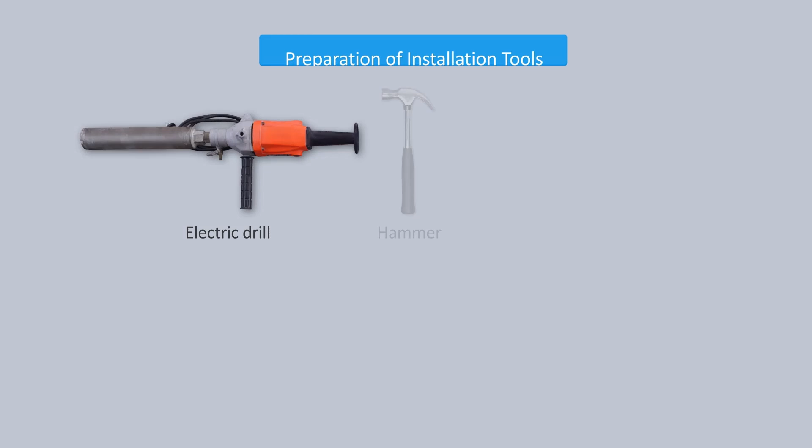Pipe preparation. Cut the suitable length of copper pipe as required. Turn pipe cutter slowly and keep increasing force gradually. Make sure there is no deformation. Cut surface should be level. Put the open of pipe downward and remove burr inside with a scraper.

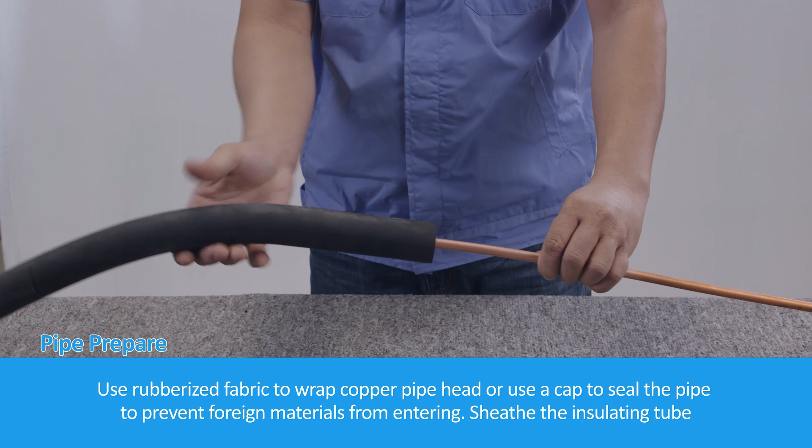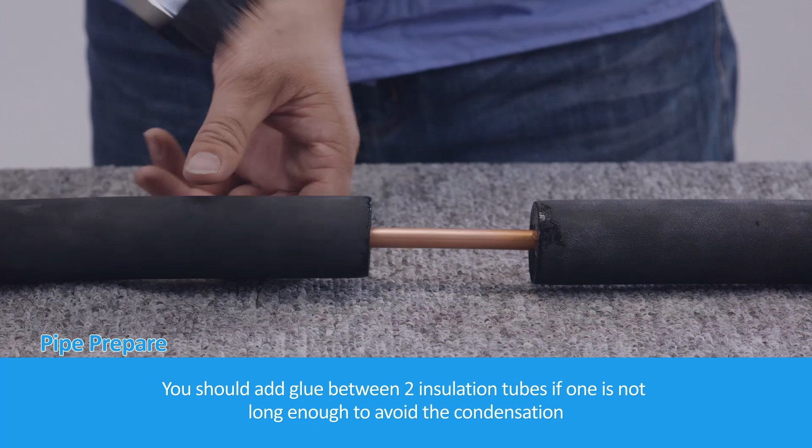Use rubberized fabric to wrap copper pipe head, or use a cap to seal the pipe to prevent foreign materials from entering. Sheath the insulating tube. You should add glue between two insulation tubes if one is not long enough to avoid the condensation. Sleeve the nut.

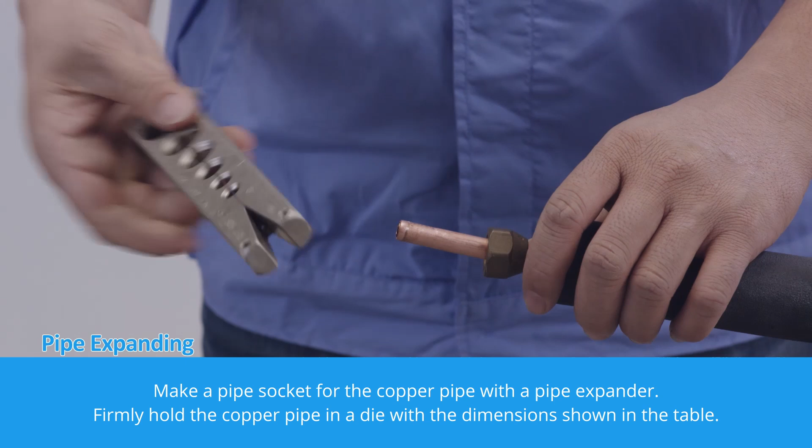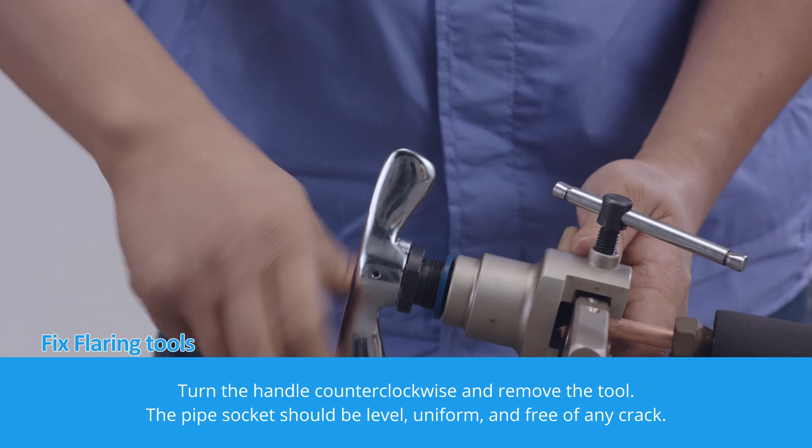Pipe expanding. Make a pipe socket for the copper pipe with a pipe expander. Firmly hold the copper pipe in a die with the dimensions shown in the table. Fix flaring tools. Turn the handle clockwise and stop it when it rattles. Turn the handle counterclockwise and remove the tool. The pipe socket should be level, uniform, and free of any crack.

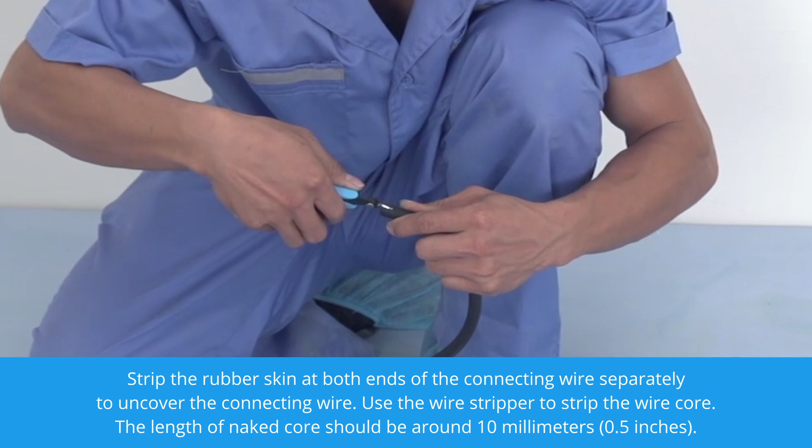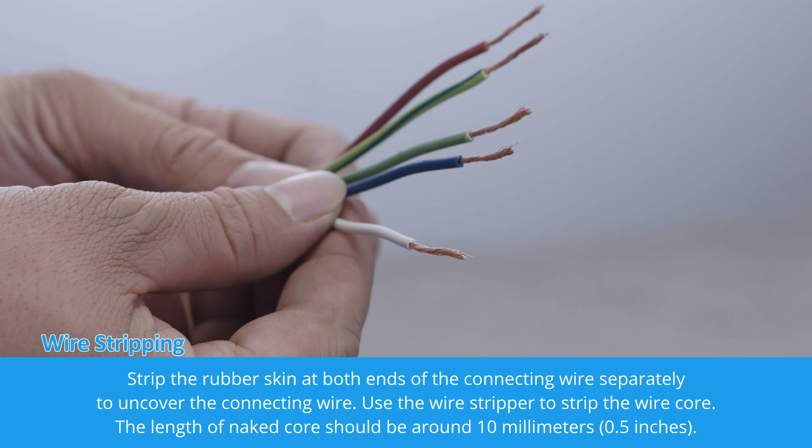Changing air return direction. Decide the air return direction based on the duct design. Back return and bottom return can be optional, but the standard configuration is back return. You can change it to bottom return manually on site. Put the unit upside down. Release the screws to remove the bottom panel.

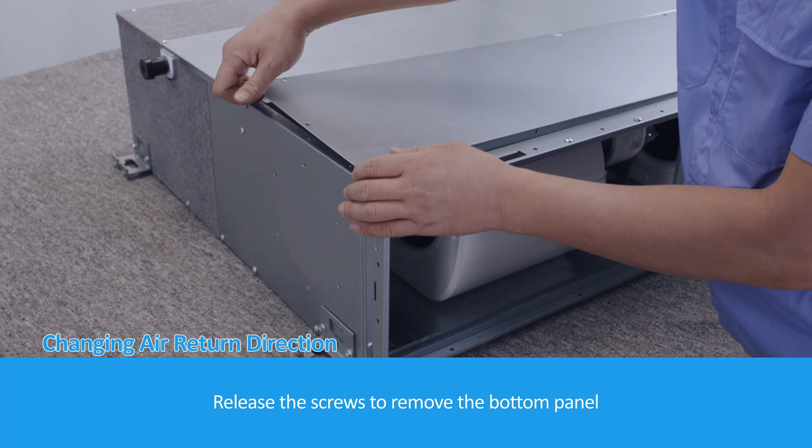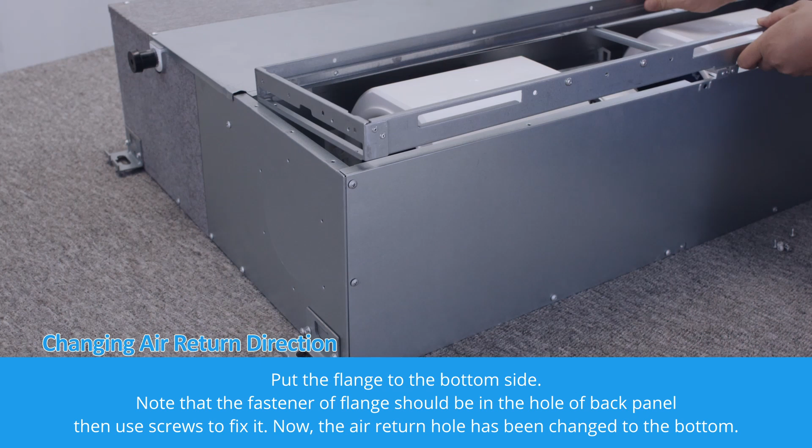Release the screws to remove the air return flange from the backside. Put the bottom panel to the backside and seal it with screws. Put the flange to the bottom side. Note that the fastener of flange should be in the hole of back panel, then use screws to fix it. Now the air return hole has been changed to the bottom.

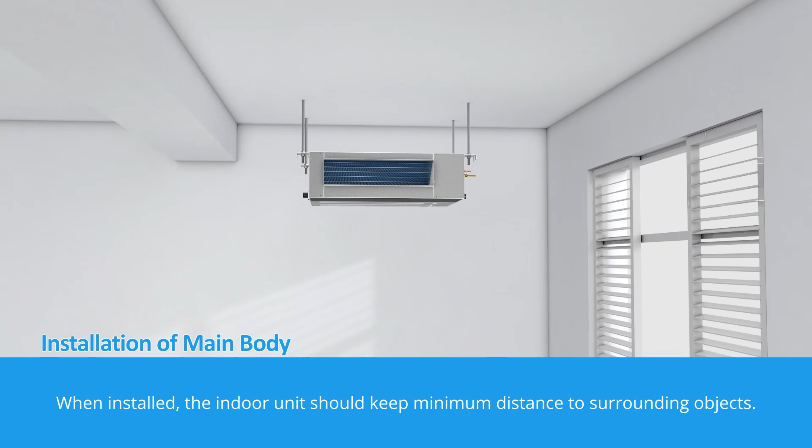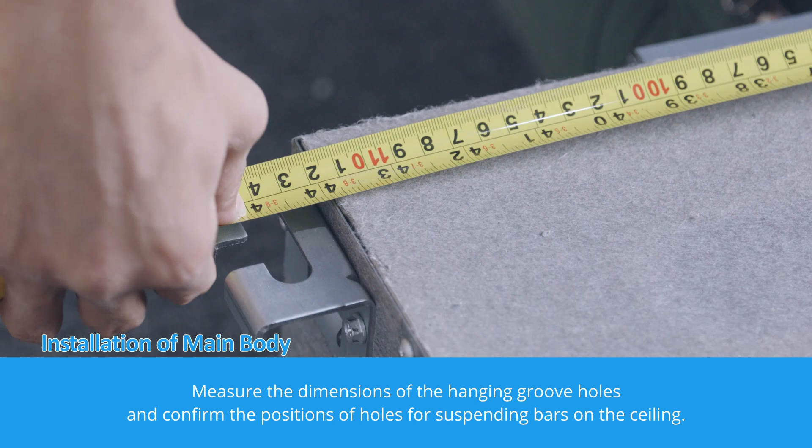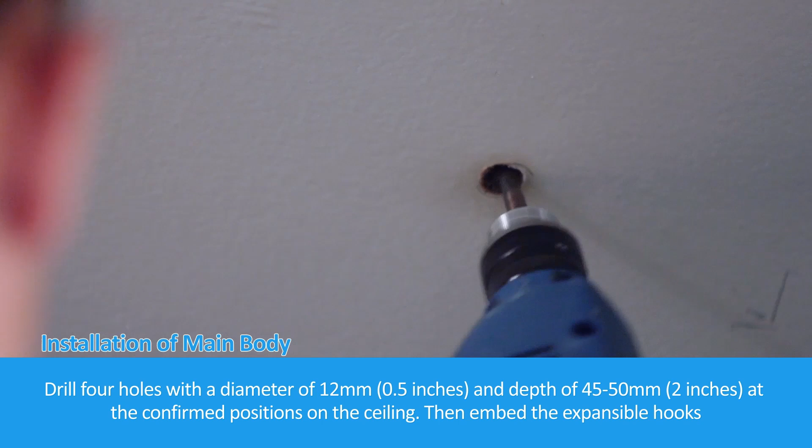Installation of main body. When installed, the indoor unit should keep minimum distance to surrounding objects. Determine the installation positions and the pipe exit direction. Measure the dimensions of the hanging groove holes and confirm the positions of holes for suspending bars on the ceiling. Drill 4 holes with a diameter of 12 millimeters or 0.5 inches and a depth of 45 to 50 millimeters or 2 inches at the confirmed positions on the ceiling, then embed the expansible hooks.

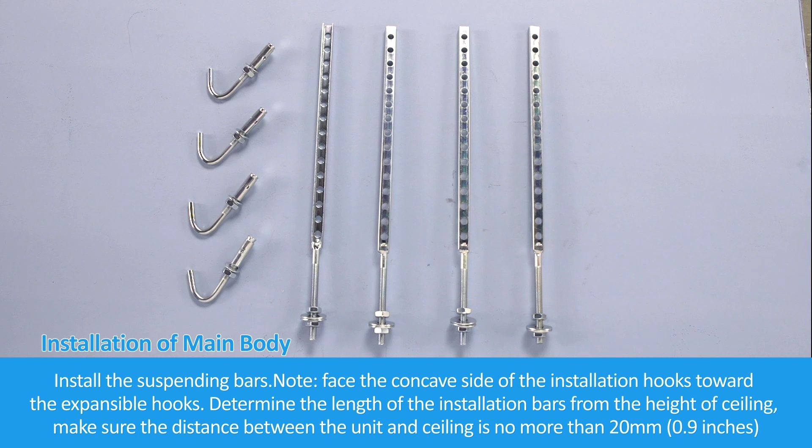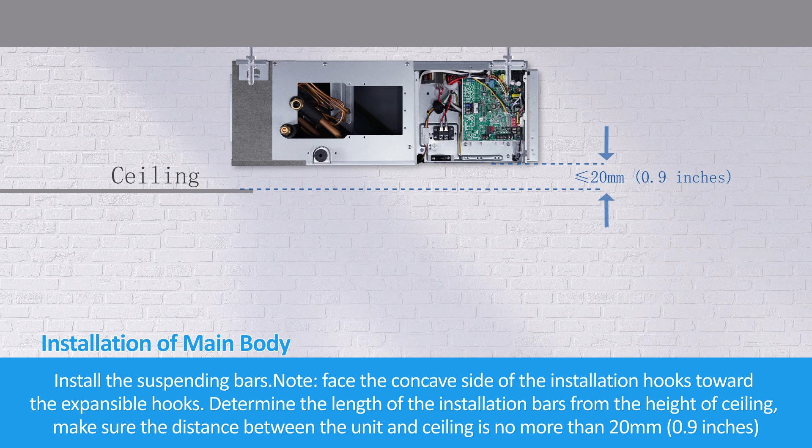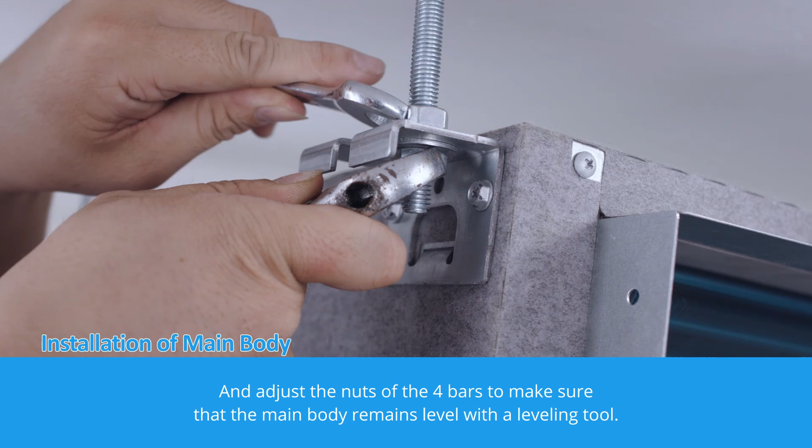Install the suspending bars. Note, face the concave side of the installation hooks towards the expansible hooks. Determine the length of installation bars from the height of ceiling. Make sure the distance between the unit and ceiling is no more than 20 millimeters or 0.9 inches. Lift the indoor unit, insert the suspending bars into the hanging groove holes at both sides of the indoor unit, and adjust the nuts of the 4 bars to make sure that the main body remains level with a leveling tool. Drill the wall hole.

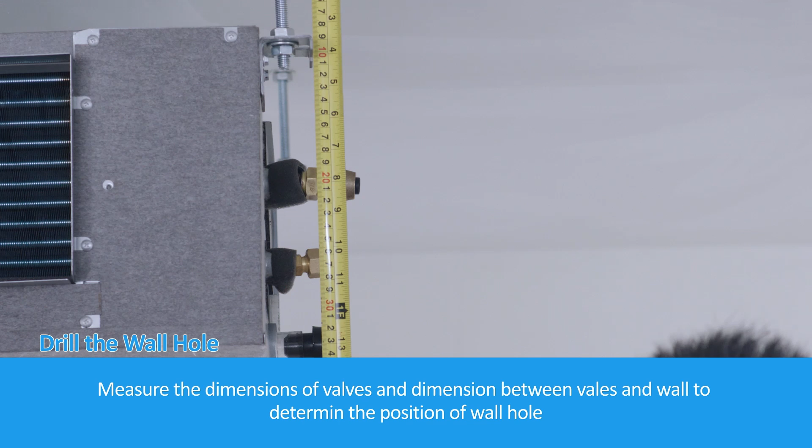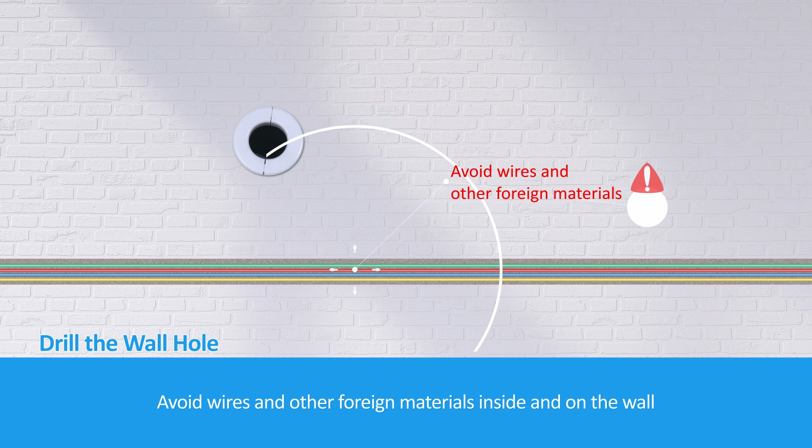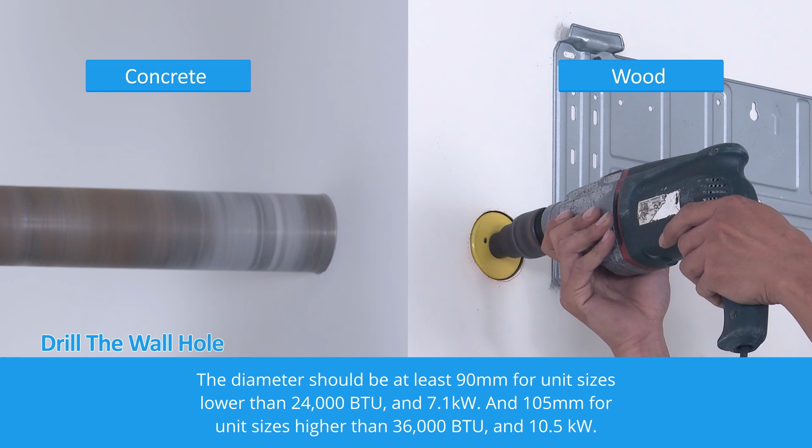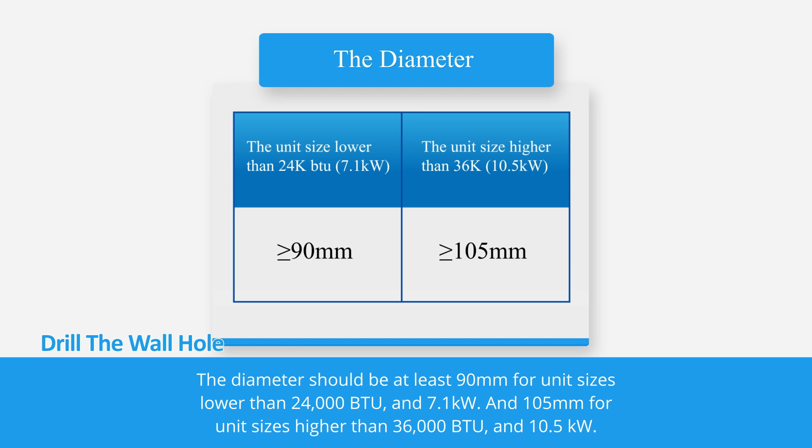Avoid wires and other foreign materials inside and on the wall. Attention should be paid that the inside of the hole should be about 10 millimeters or 0.5 inches higher than the outside for good drainage. The position of the wall hole should be a little lower than the lower side of the unit. Drill the wall hole. The diameter should be at least 90 millimeters for unit sizes lower than 24,000 BTU and 7.1 kilowatts, and 105 millimeters for unit sizes higher than 36,000 BTU and 10.5 kilowatt. Put on the wall socket.

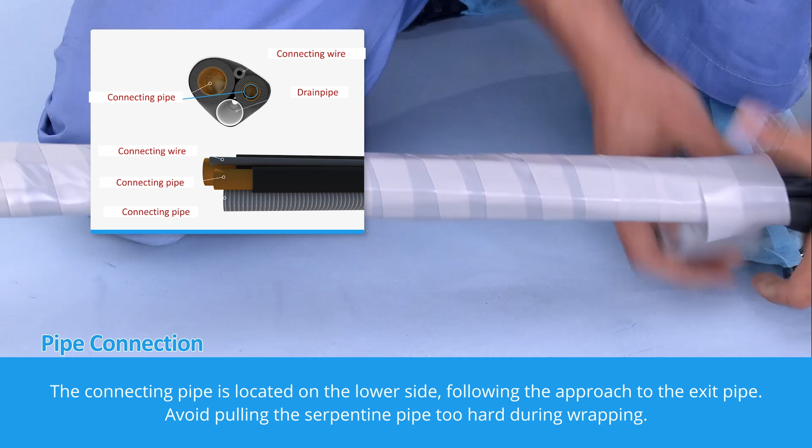Pipe connection. Bind the connection pipes and wires together using wrapping tape. Wrapping should be applied where the power wire and signal wire are positioned on the upper side. The connecting pipe is located on the lower side following the approach to the exit pipe. Avoid pulling the serpentine pipe too hard during wrapping. The drain pipe should be sheathed in an insulating pipe to provide thermal insulation and prevent condensation or leakage on its outer surface.

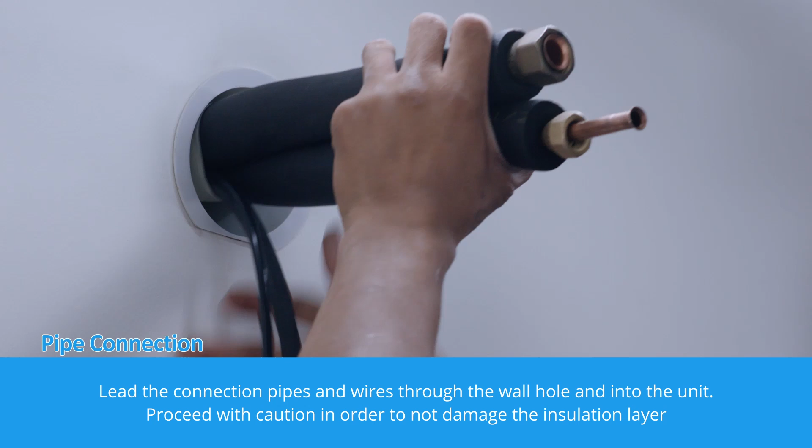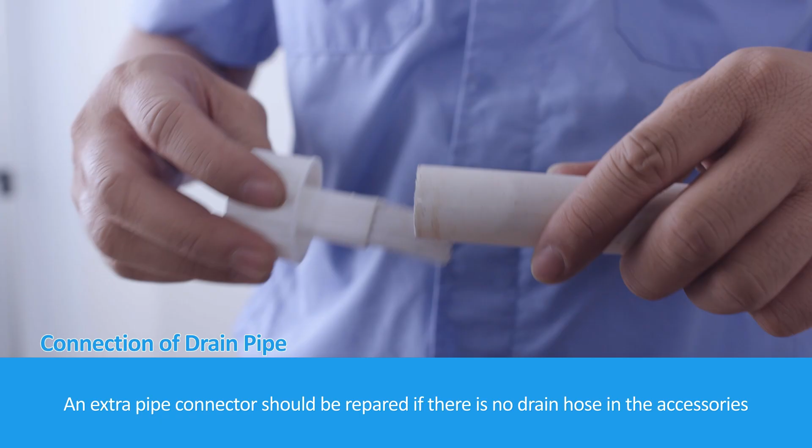Lead the connection pipes and wires through the wall hole and into the unit. Proceed with caution in order to not damage the insulation layer. Remove the protecting nut of the copper pipe. The cone should be vertical to the top pipe socket. 2 wrenches are used to fasten the nut after the connecting nut is screwed to the bottom of the bolt manually. Loosen it moderately after tightening for further tightening. First connect the high pressure pipe, then the low pressure pipe. Connection of drain pipe. An extra pipe connector should be prepared if there is no drain hose in the accessories.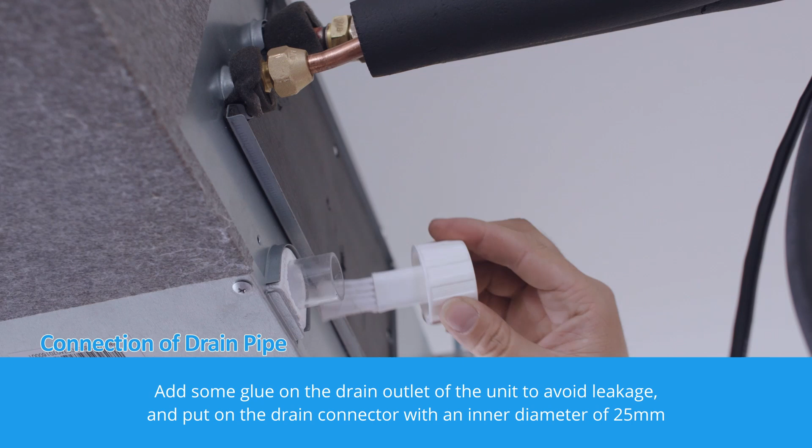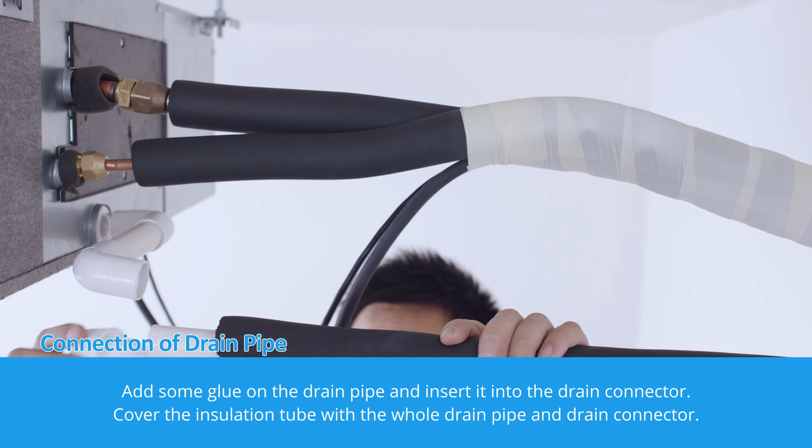Add some glue on the drain outlet of the unit to avoid leakage and put on the drain connector with an inner diameter of 25 millimeters. Add some glue on the drain pipe and insert it into the drain connector. Cover the insulation tube with the whole drain pipe and drain connector.

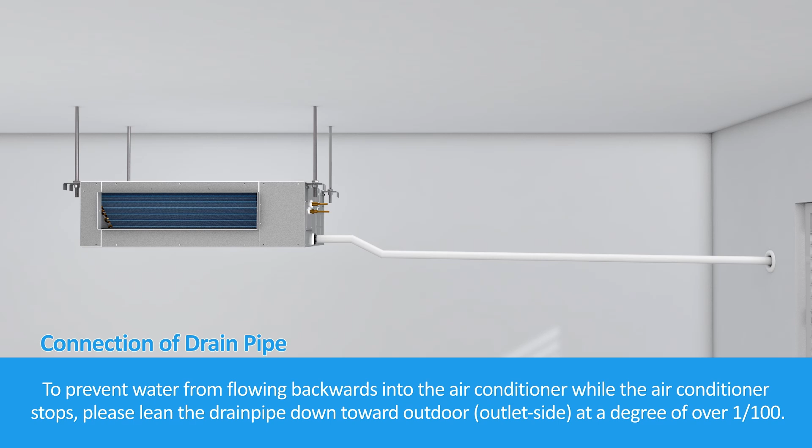Do not pull the drain pipe in order to prevent the main body from being pulled. To prevent water from flowing backwards into the air conditioner while the air conditioner stops, please lean the drain pipe down toward the outdoor outlet side at a degree of over 1/100th.

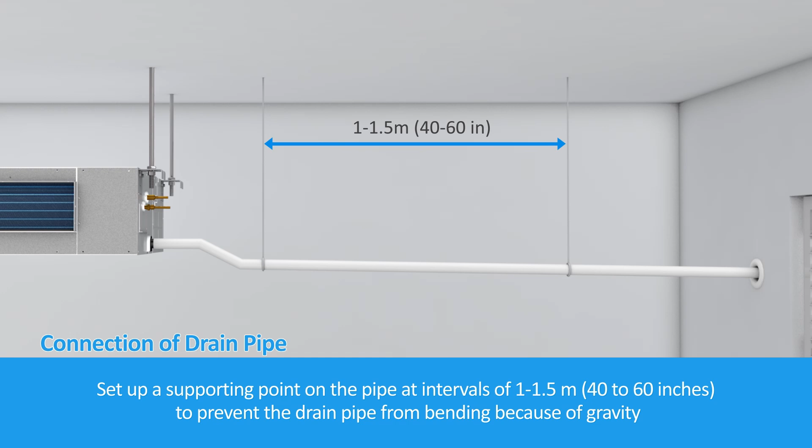Set up a supporting point on the pipe at intervals of 1 to 1.5 meters or 40 to 60 inches to prevent the drain pipe from bending because of gravity. If the drain pipe is over the required length, it is required to add a vent hole at certain intervals to ensure smooth drainage. The end of the drain pipe should not directly touch the ground.

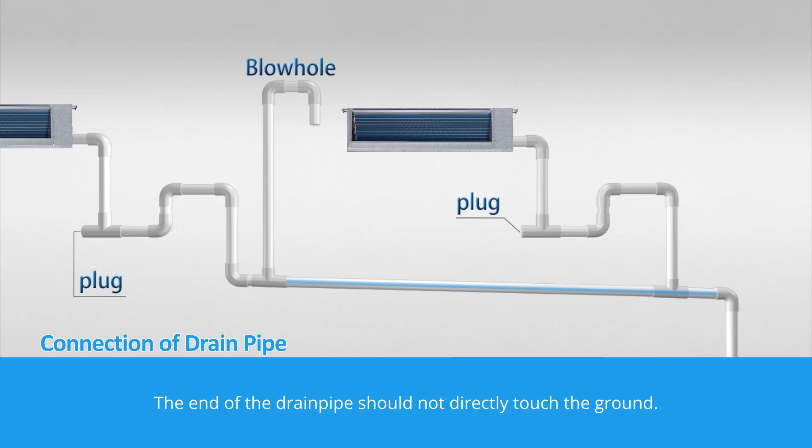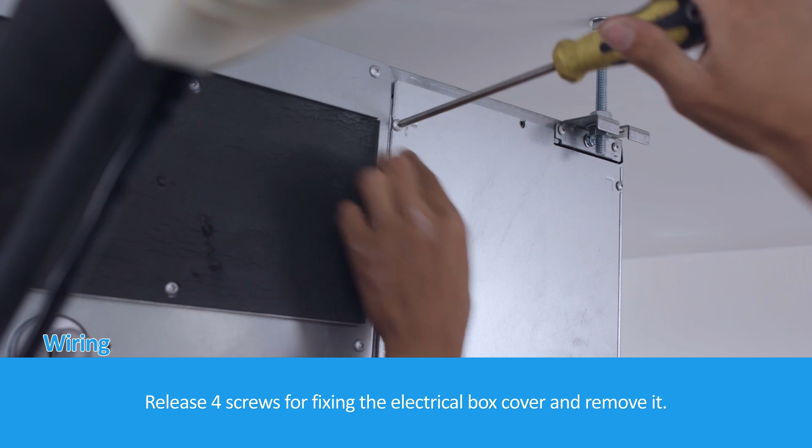Wiring. Make the wiring work strictly as the diagram shows. Release 4 screws for fixing the electrical box cover and remove it. Connect the power cable and communication cable to relative terminals. Note the LN sequence of power wires and terminal.

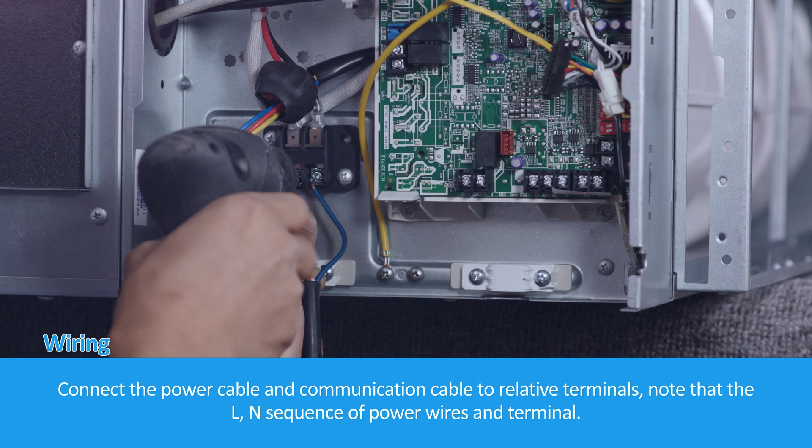About the communication, S1 and S2 are without polarity, but the cable must be shielded and the shell should be earthed. Release the fixing screws and take down the cable pressing pad. Arrange the cables well through the gap of the box, press them with the pad, and use screws to fix it. Make sure that the connection is not pulled.

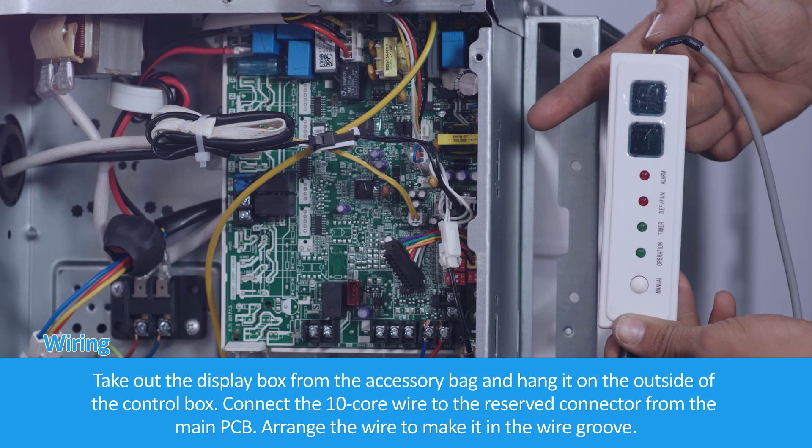Take out the display box from the accessory bag and hang it on the outside of the control box. Connect the 10-core wire to the reserved connector from the main PCB. Arrange the wire to make it in the wire groove. Connect the wire of wired controller to the connector from the display box. Close the electrical box cover and fix it with screws.

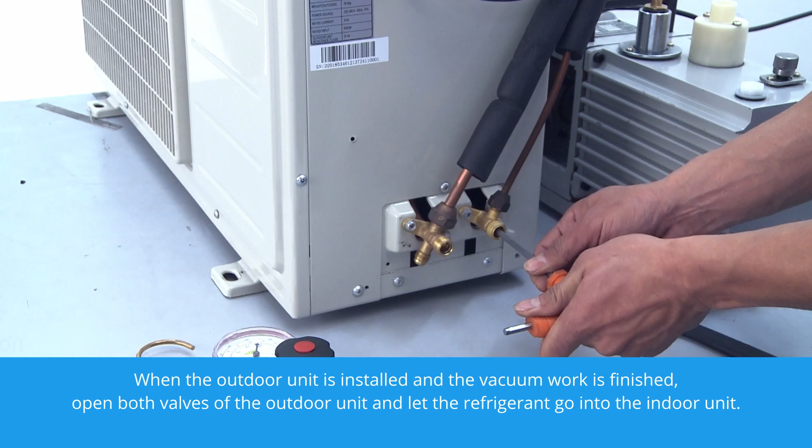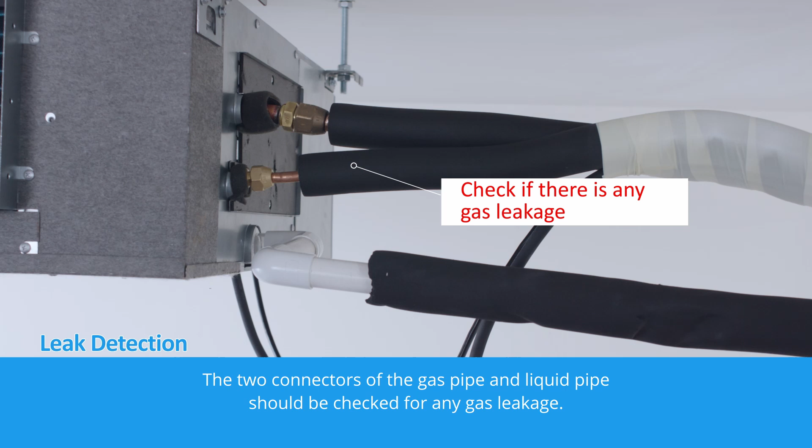Leak detection. When the outdoor unit is installed and the vacuum work is finished, open both valves of the outdoor unit and let the refrigerant go into the indoor unit. The 2 connectors of the gas pipe and liquid pipe should be checked for any gas leakage. Leak detector detection.

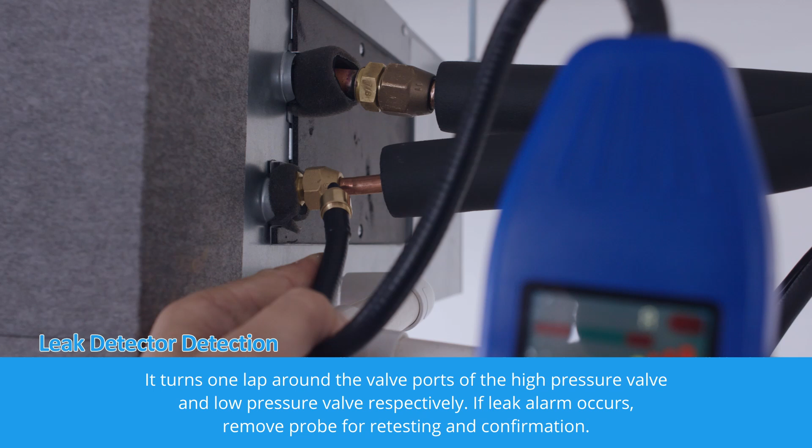The probe moves around 2 connectors at a slow and uniform speed of 2 to 5 centimeters a second, and the probe is kept 1 millimeter to 5 millimeters, or 0.04 to 0.2 inches, away from the connectors. It turns 1 lap around the valve ports of the high pressure valve and low pressure valve respectively. If a leak alarm occurs, remove the probe for retesting and confirmation.

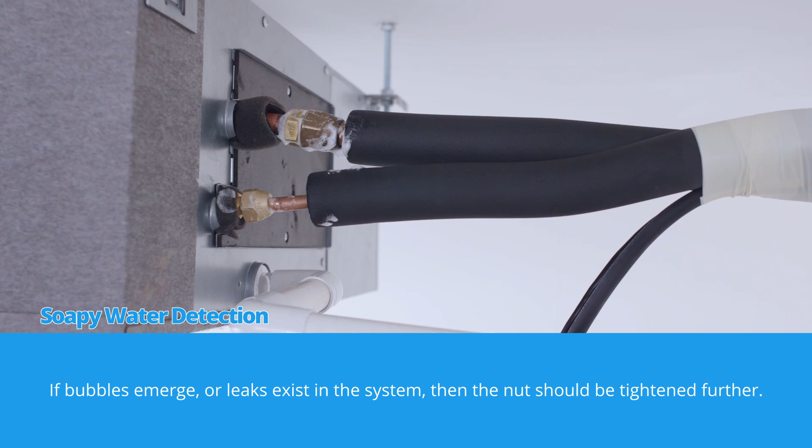Soapy water detection. Apply soapy water of high concentration with a brush to all interfaces of nuts, then observe it for 2 to 3 minutes. Repeat this as needed. If bubbles emerge or leaks exist in the system, then the nut should be tightened further. Cover the connectors with insulation tube and band them with banding tape. Washing powder is inapplicable for testing.

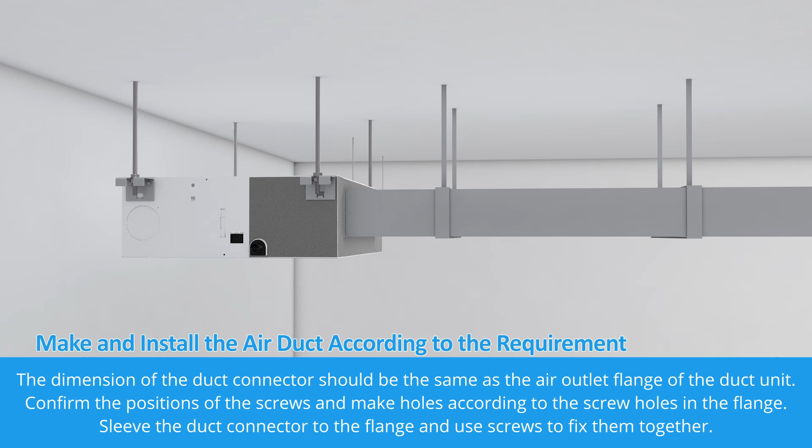Make and install the air duct according to the requirement. The dimension of the duct connector should be the same as the air outlet flange of the duct unit. Confirm the positions of the screws and make holes according to the screw holes in the flange. Sleeve the duct connector to the flange and use screws to fix them together.

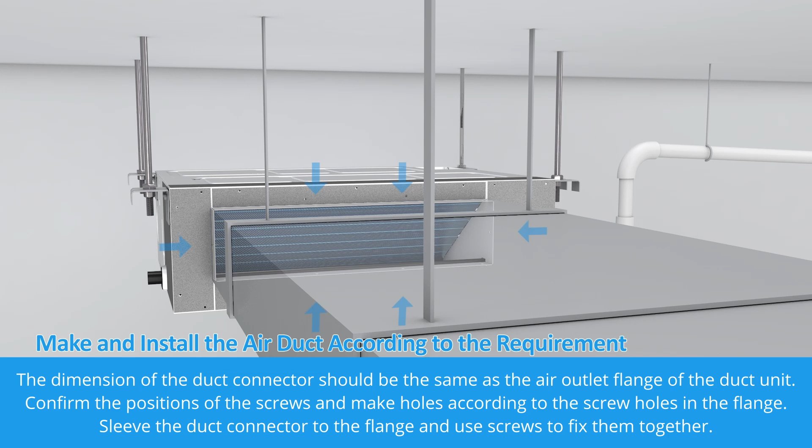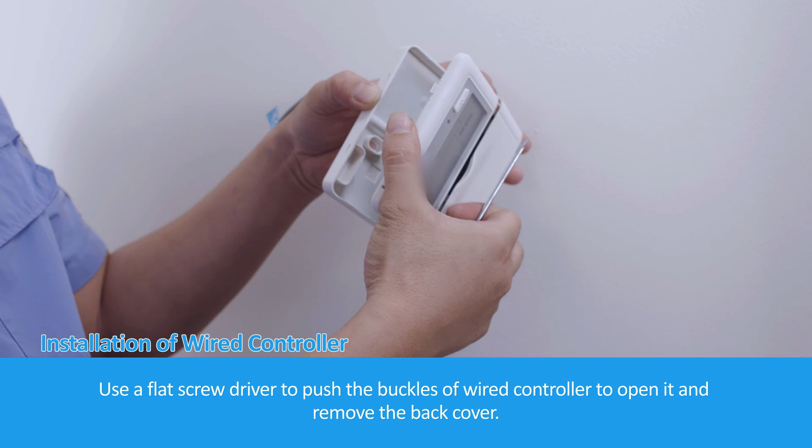Installation of wired controller. Use a flat screwdriver to push the buckles of the wired controller to open it and remove the back cover. Determine the installation position and use the back cover to locate the screw holes. Drill screw holes, and a wire hole if you want to conceal the wire. Make the connector go through the back cover and fix the back cover on the wall with screws.

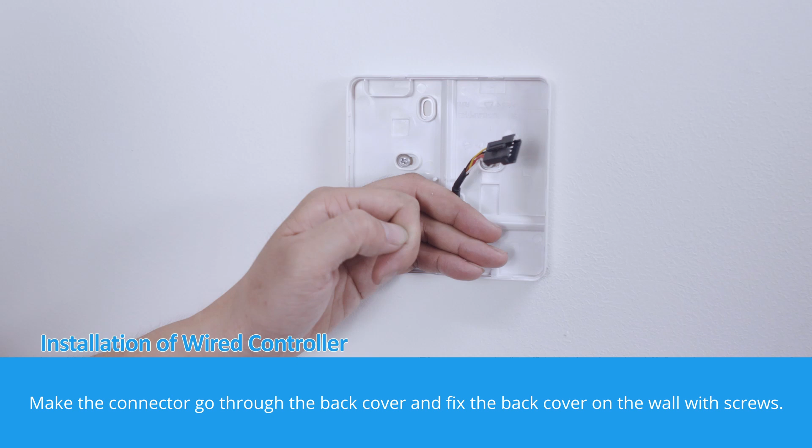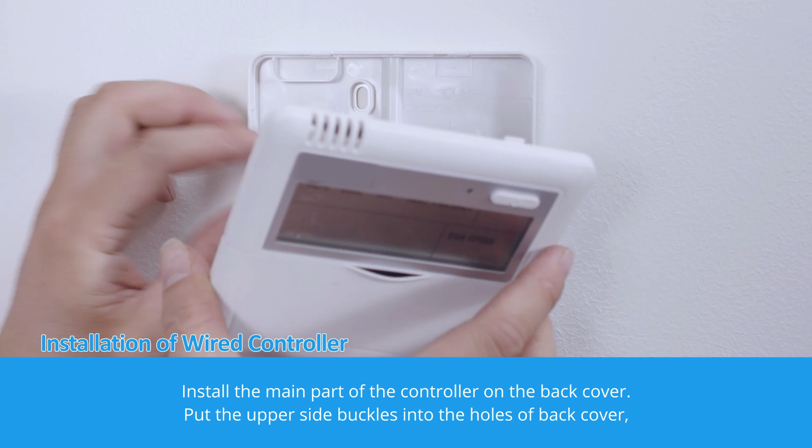Connect the wired controller. Install the main part of the controller on the back cover. Put the upper side buckles into the holes of the back cover, then push the lower side to the cover until a click sound happens.

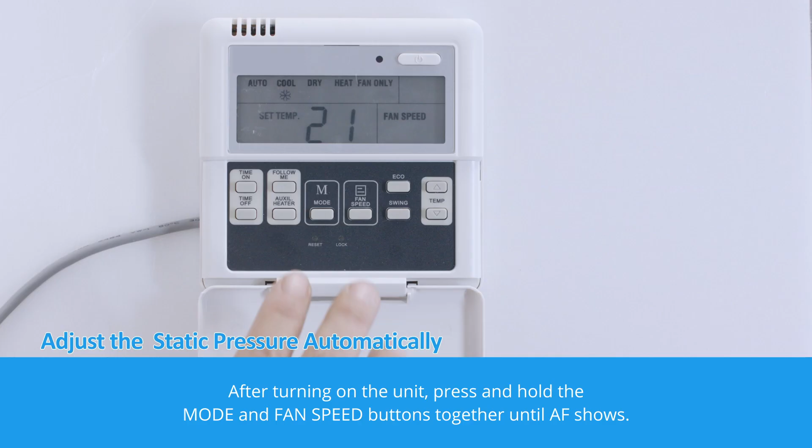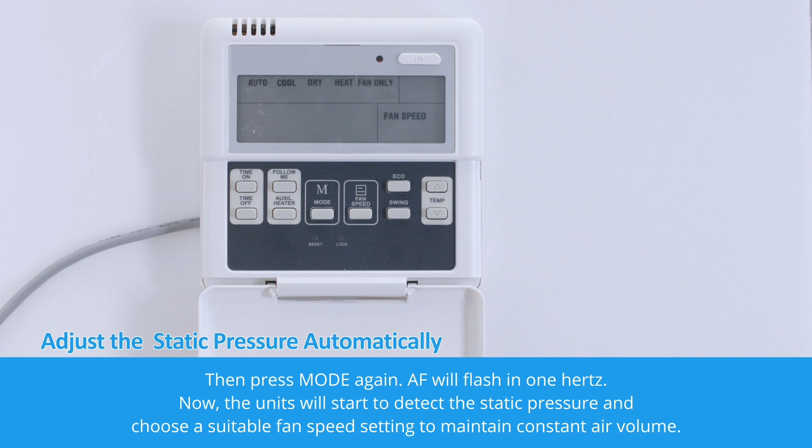Adjust the static pressure automatically, for units with DC motor only. After turning on the unit, press and hold the mode and fan speed buttons together until AF shows. Then press mode again. AF will flash at 1 Hz. Now the unit will start to detect the static pressure and choose a suitable fan speed setting to maintain constant air volume. After 3 to 5 minutes, AF disappears and the unit turns off by itself. Now the operation is done.

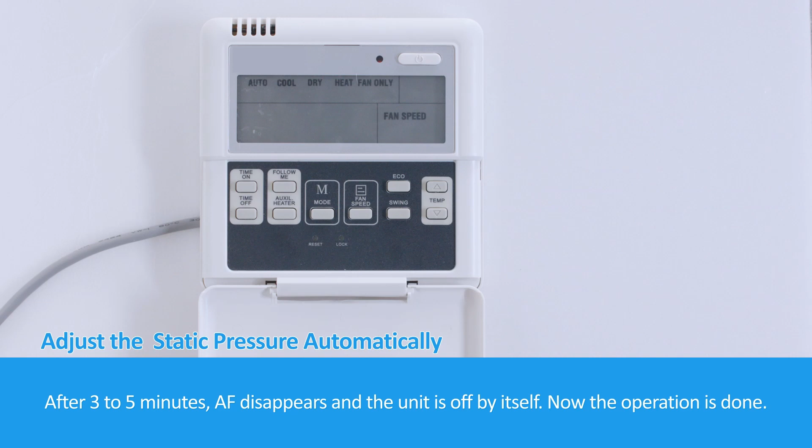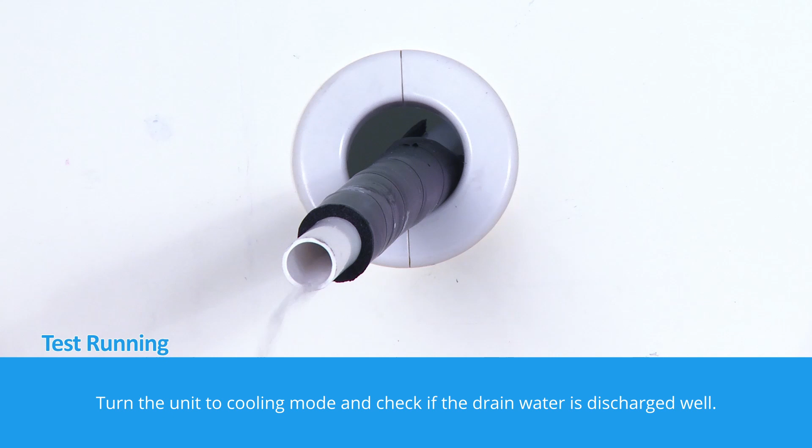Test running. Use the wired controller to check if all the functions are normal. Turn the unit to cooling mode and check if the drain water is discharged well. Treat the drain pipe well. Seal the wall hole to keep outside air and other objects from entering the room.